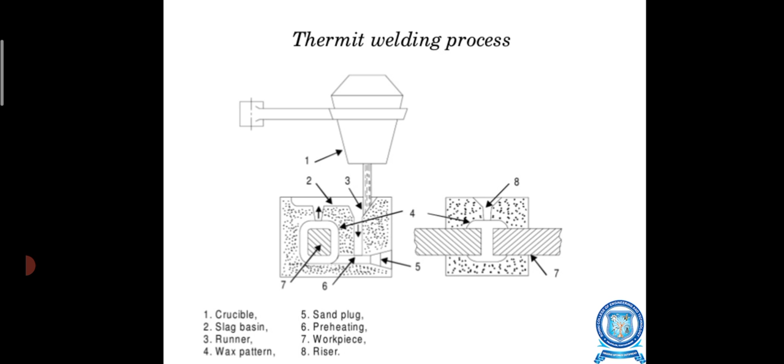Next we have to see thermit welding. Thermit welding, or you can say aluminothermic welding, is a fusion welding process in which the workpieces are joined by heat obtained from a chemical reaction of a thermit mixture. In this process, pressure may or may not be applied. Basically this kind of welding process is used to join rail tracks in the maintenance of rail tracks.

The thermit mixture is a mixture of iron oxide and aluminum powder, and when this mixture is brought to its ignition temperature of around 1200 degrees centigrade, the reaction starts, producing molten iron and slag and releasing an enormous amount of heat. You can see the reaction: iron oxide in the presence of aluminum powder gives iron plus aluminum oxide with a large amount of heat.

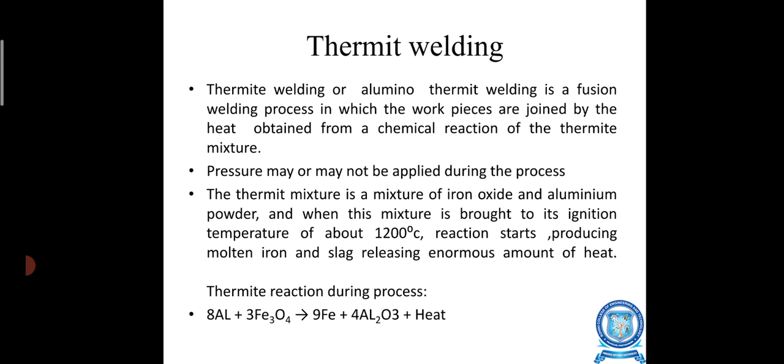This kind of reaction takes place in a thermit mixture. These two materials, iron oxide and aluminum powder, are known as the thermit mixture that is used in thermit welding. Next, you can see this is the whole setup of the thermit welding process, starting with the crucible. Into the crucible, the thermit mixture of iron oxide and aluminum powder is filled and needs to be ignited.

The second part is the basin. You can see the bottom side of the crucible will be directly connected with the slag basin, so by the opening, the thermit mixture will flow towards the basin. From the basin then the runner, then the riser, and this is the cavity, and beside it will be a riser. A similar basic terminology is used in the casting process. This is the runner, here is the preheating area, and this is the workpiece.

At the bottom side, a sand plug is used to control or stop the flow of the molten metal to the other side. There will be a wax pattern heated over here. By the running of the high temperature molten metal, it will go into the liquid state, so this wax pattern can be easily removed. It is used whenever there are difficulties taking the pattern out of the mold.

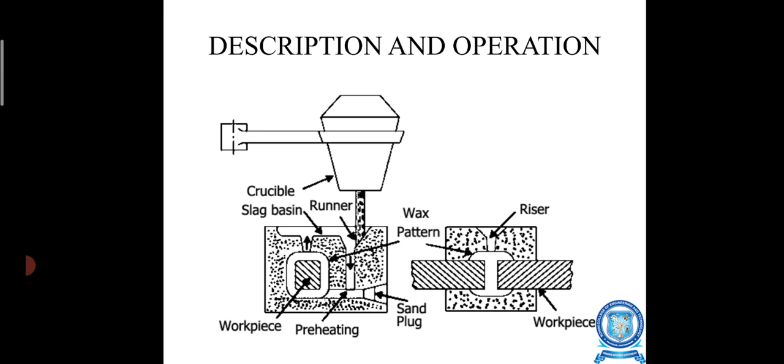The edges of the workpieces are cut flat and clean to remove dirt, grease and other impurities, to obtain a sound weld; this is the basic fundamental requirement of the thermit welding process. A gap of about 1.5 to 6 mm is left between the edges of the two workpieces, which will depend upon the size and shape of the section to be welded.

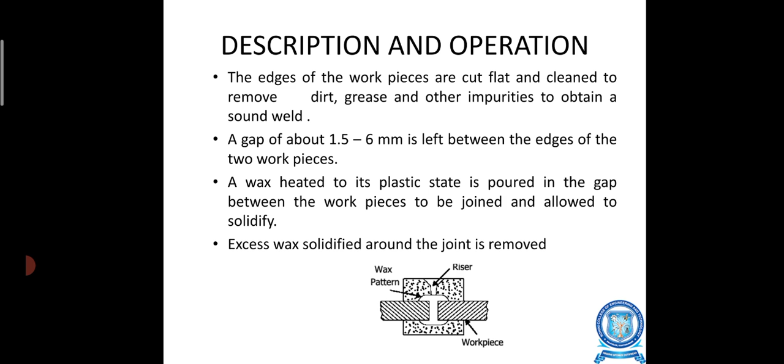A wax heated to its plastic state is poured into the gap between the workpieces to be joined and allowed to solidify. The excess wax solidified around the joint is removed. Then a mold box is placed around the joint and packed with sand, providing necessary risers. Fundamental knowledge is required for making the runner and riser.

Then the molten metal will easily fill the cavity and solidify, and the joint is carried out according to the casting process. A hole or heating gate is made into the mold connecting to the joint, as shown in the figure. The wax material is melted out by means of a flame directed into the heating gate, so that it leaves a cavity at the joint which will later be occupied by the molten metal.

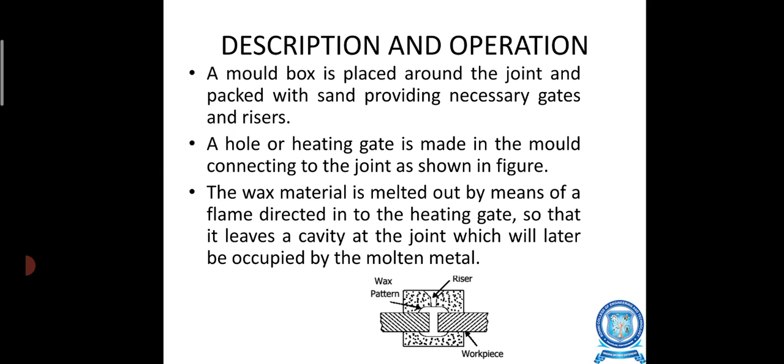Basically, the wax pattern is used because it is difficult to remove the pattern from the mold. After making the cavity, the heating gate is closed with a sand core or iron plug. A crucible containing the thermit mixture is suspended above the pouring cup, as discussed in the previous figure. The mixture is ignited by lighting a magnesium ribbon or with the help of a sparkler.

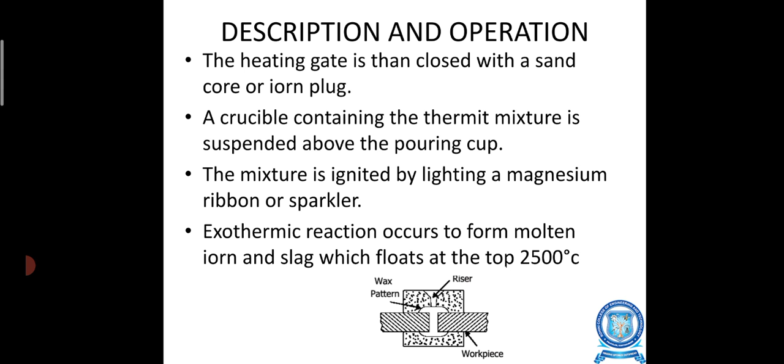An exothermic reaction occurs to form molten iron and slag, which floats at the top, at around 2500 degrees centigrade. The reaction is allowed a specific time, around 60 seconds, and the slag is removed from the surface of the molten metal. The plug at the bottom of the crucible is opened and the molten metal is poured into the cavity.

You can see the thermite mixture is placed in the crucible, then it flows directly through this basin towards the cavity; this is a top gate system, so you design it as per the complexity and size of the job. The molten metal acts as a filler metal, melts the edges of the joint and fuses to form a weld.

After the weld joint cools and solidifies, the mold is broken. Risers are cut and the joint is finished by machining and with the help of secondary operations like grinding, similar to the steps followed in a casting process.

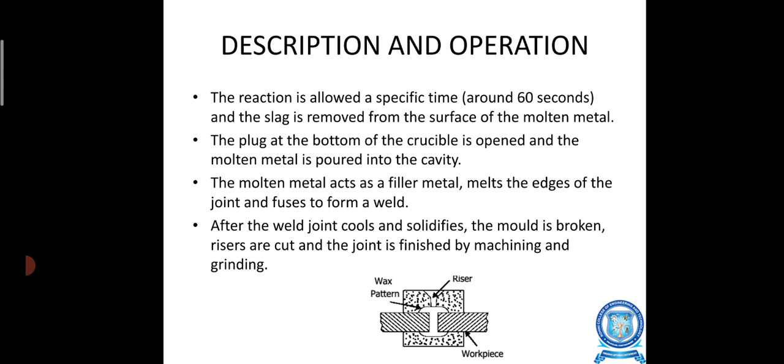Next, we have to see the advantages of the thermite welding process. Heat required for welding is obtained from the chemical reaction of the thermite mixture, hence there is no power cost and no requirement for an additional power source. The process is best suited to remote locations where sophisticated welding equipment and power supply cannot be easily arranged.

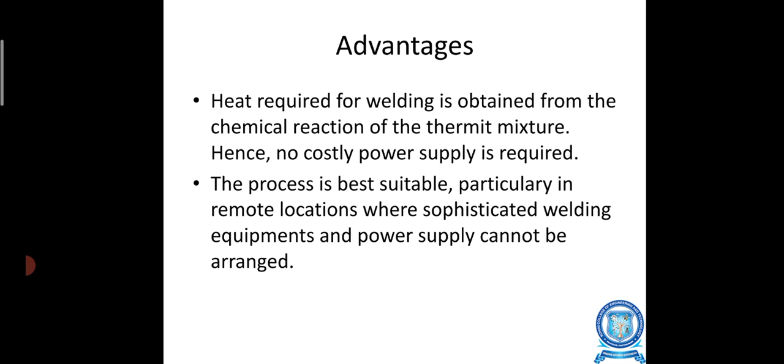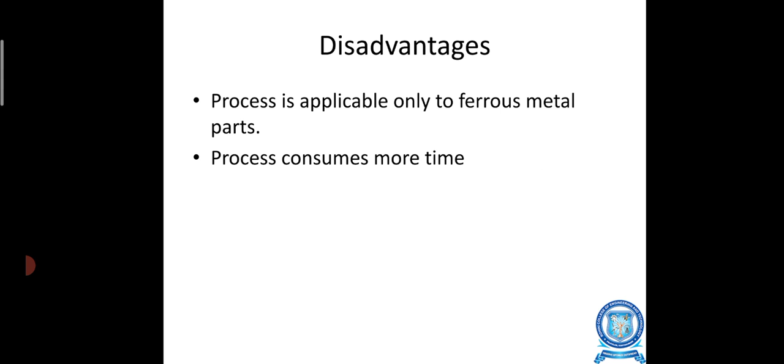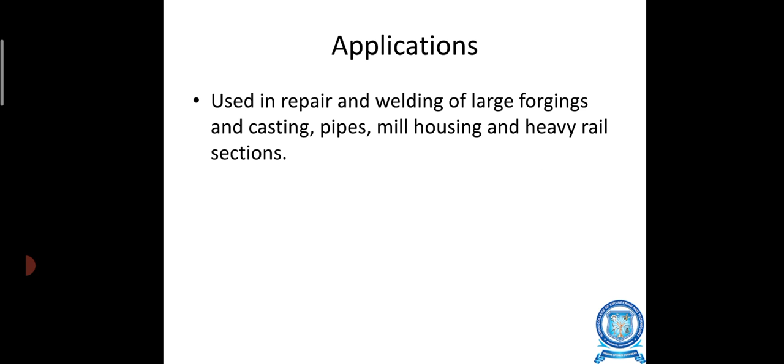Next, the disadvantages of thermite welding: the process is applicable only to ferrous metal parts, and it consumes more time. Next, the applications of thermite welding: it is used in repair and welding of large forgings and castings, pipes, mill housings and heavy rail sections. Thank you to all.